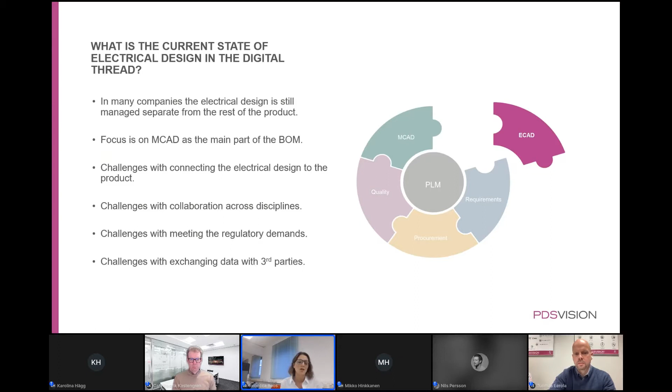And this leads us to the obvious question then. Can the electrical design be included in the digital thread? And the answer is yes, of course. You have all the tools already.

That allows you to have the ECAD data integrated, not only into the BOM, but also visible in the model across the enterprise and possible to share with production or third parties, and even used in the extended digital thread when the product has left the production facilities. And it can be used in simulations. So what can it look like when ECAD is integrated into the digital thread then?

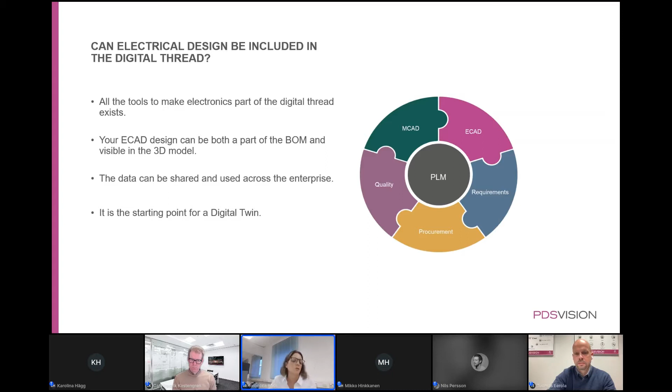I'm going to share an example with you. So what we see here is a snowmobile in Windchill, where the ECAD information is fully integrated. We see the BOM and we see a visual of the model. You can see a lot of information related to the items in the BOM here. What it is, quantity, what state it's in, if it's released, for instance. And there's also information related to sourcing, if it's a make item or a buy item.

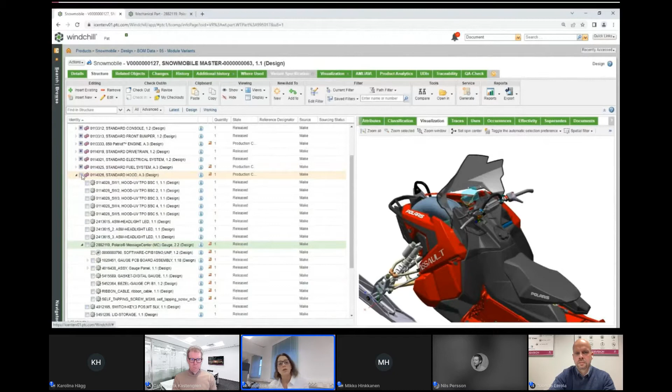We are able to navigate the BOM. We can see the connections between the BOM and the model. You can, from a selection in the BOM, see that part highlighted in the model. And it works the other way around as well. Selecting a part in the model, and you can see where it resides in the BOM. You can zoom in and you can zoom out and twist and turn the model, as well as hide parts.

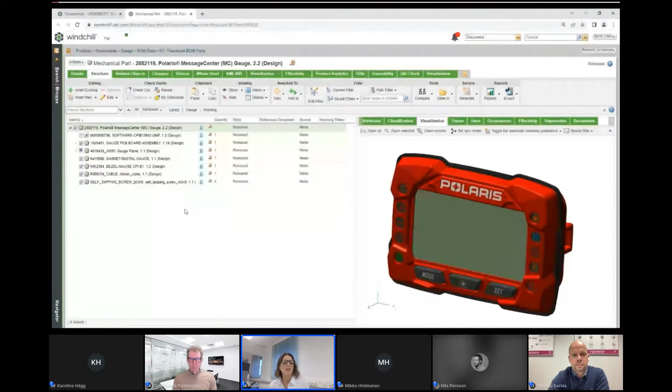In this example, we want to look at the display unit, since that one includes electronics. So for sake of simplicity, we open this one in a separate tab. And here you can see the BOM, and you can navigate the BOM in the same way as we did for the big snowmobile. And we can click and see the entire ECAD BOM. So the behavior here is the same as for the MCAD.

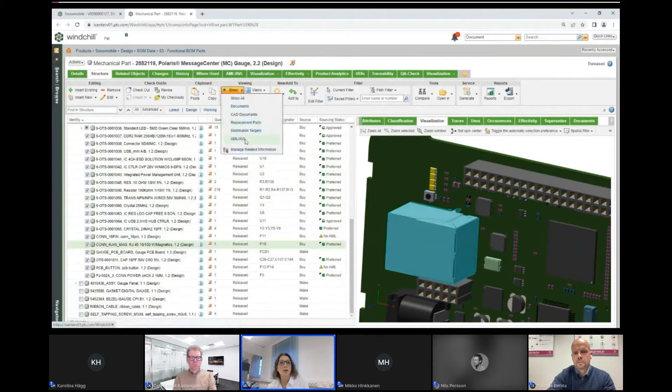For the ECAD, you can see a lot of information. Here, you can see reference designators being an important thing for electronics. You can see that you have documentation and information available, relevant files. You can also see information related to suppliers with a link to approved vendor lists and approved manufacturer lists. In the same way, you can also view information about, for instance, RoHS and REACH, something that we will touch upon later.

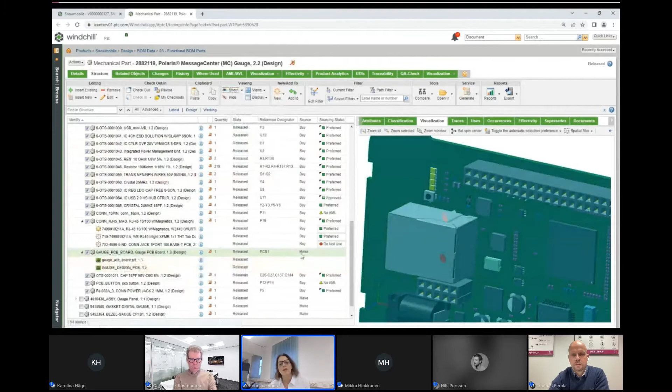And having all this information in one place, available for everyone, traceable and reliable, does not only increase the efficiency, but it also improves quality and creates a foundation for good cross-functional collaboration, where you are able to look at the entire BOM, not only the mechanical parts of it.

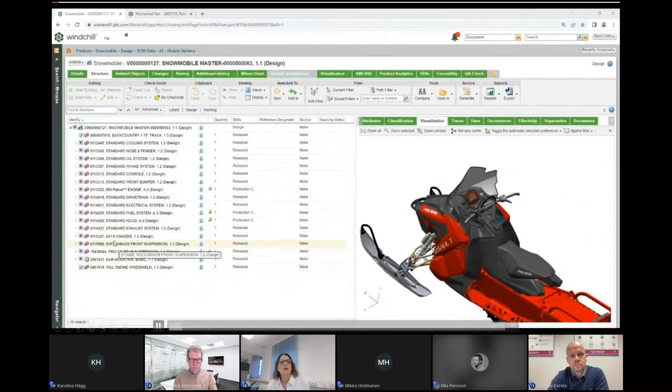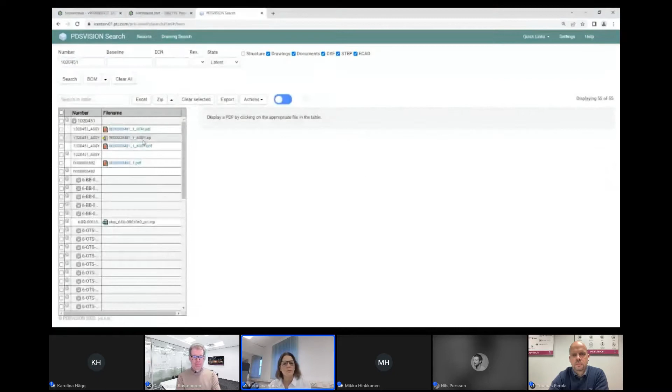You can select if you want to see the complete BOM, what kind of formats you want to see. And for the sake of usability, there's also images available. You can select if you want to see the PDFs. You can open them up to view the information. And you can also select what information you would like to prepare and package for, for instance, communication with suppliers or even customers.

So this is one way of communicating with third parties. This communication can also take place via, for instance, a supplier portal. And when working with the supplier portal, it's also possible for the supplier to upload information that you can, in a later state, then include in the BOM, which can be a valid case if the design is outsourced.

Okay, so we've talked about and we looked at what the reality can be like with an integration of ECAD data into PLM and the BOM, examples of what you can see and what you can do. So what values does such an integration bring to a company?

First and foremost, having all the product information in one place gives some obvious and immediate values. You have the visibility of the complete product across the enterprise, allowing everyone to look at the same reliable information. This obviously facilitates collaboration, both in virtual teams, across sites, and it makes life easier in production, service, and aftermarket when you can view the same information. This also means that you're able to have the right people working on the right version of the right data.

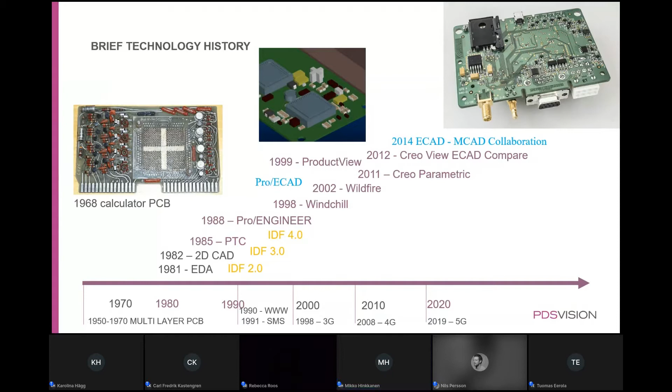So if you take a look at the Pro ECAD product that emerged in the late 1990s, you could already then bring in the key components from electrical design, make them visible in mechanical CAD, and start collaborating and discussing whether there are interferences between the components or if the bill of material should be in the mechanical CAD or the electronics CAD. So it's quite a long way ago, over 20 years.

And over the years, we have refined our technology and made it more and more mature. And today, you really can't tell on the top right image if that is from the mechanical CAD or if that is just a photograph of the actual component. So today we are able to really nicely exchange the product information from one domain to another, thus enabling a cross-functional team to work. Next slide, please.

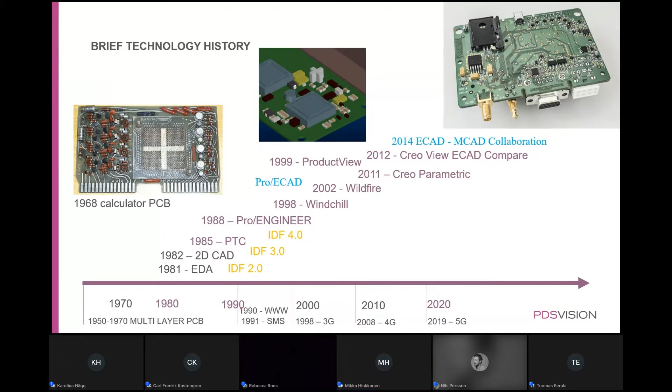And if we take a look at how the actual data exchange happens between the electronics CAD and mechanical CAD domains, today we have text files which we push back and forth, and they describe the products at both ends of the system. And that has been there for a good amount of years. But on the other hand, if we look at the way it's been managed, if you just write out the ECAD files to a disk and then read them in, this leaves a lot of room for improvement when it comes to making sure that you always have the latest version of the data at hand. So next slide, please.

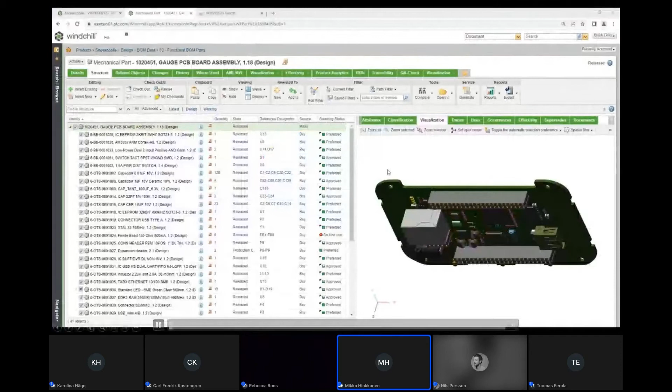And if we take a small video and take a look how does it look like really. We have the same PCB that Rebecca just showed us. And if you go for different visualization formats of it and open them in the same Creo View system, then something magical starts to happen.

So first you open just a mechanical kind of model where you can see all the components. And then additionally, we will add some more information here. As you can see, when you open it in Creo View, you can add it to the same session, thus making all of those three viewables available for you.

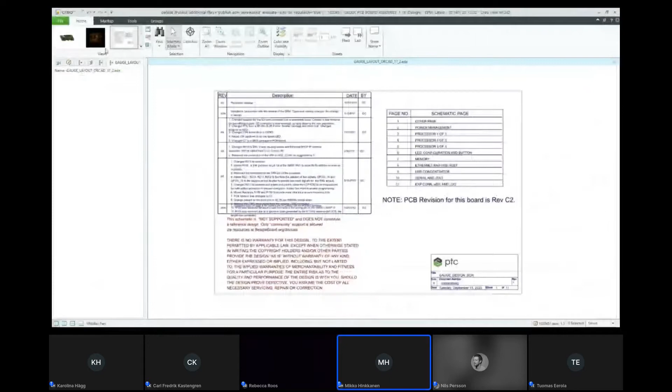And in here we have a drawing for that particular item. And here we have a kind of layout, which you can start controlling. Do we have logical connections, or do we actually have the routing or the conductors between the components? And do we want to see the printed silks and all that kind of component information? Just filter based on your needs.

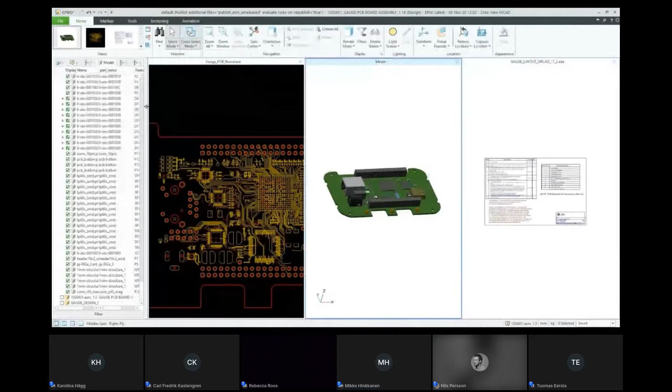And then you can have them side by side, which of course makes it quite handy to understand what is exactly happening here.

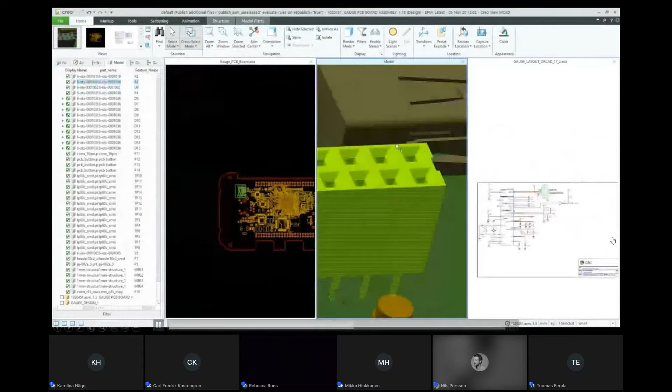So now when you start clicking around, you can enable so-called cross-highlighting, so working on one component somewhere always updates the information on the other windows. Let's see. As you can see, clicking that component will highlight it on the other window. So it's getting a bit easier today to probe the product and find out exactly what is happening here, or what the design is.

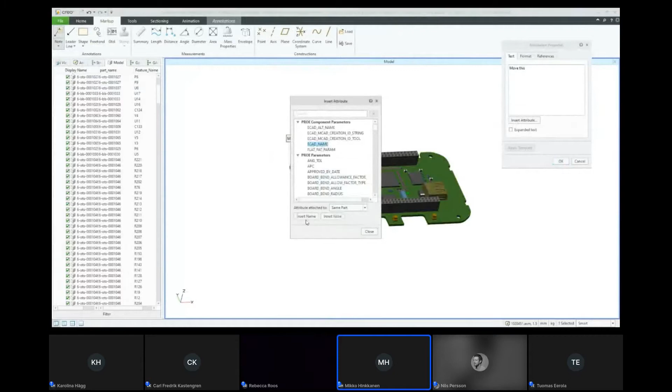And when it comes to collaborating, if you have a geographically distributed design environment where, let's say, electrical design is in the United States but the mechanical is in Europe, then what we want to do sometimes is write notes back and forth in order to document the changes or document the requests. Can I move, for example, this one a bit?

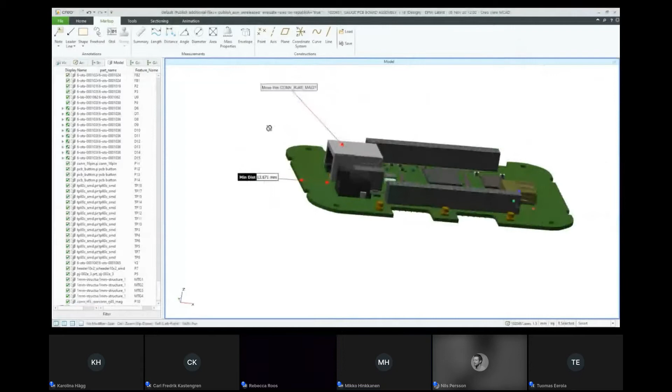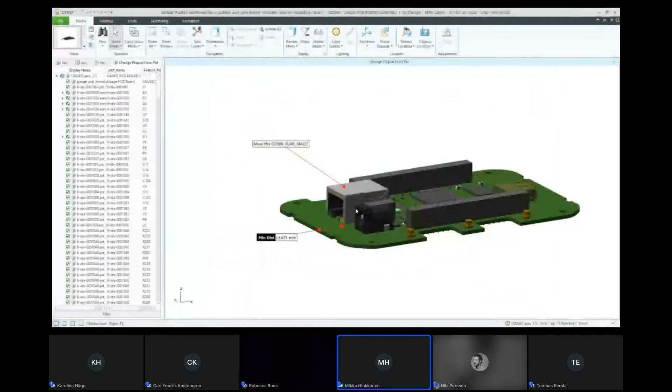So what I do is save an annotation set in the model, write some kind of comment like 'please change this one' or 'can I change this potentially?' Store it, and it will be stored on Windchill on the product information. And of course, you can share that for your teammate and ask kindly whether it would be possible to change this. Please take a look at the link, and when he opens it, it opens up exactly the same for him as well. So it's enabling really nicely the collaboration between the domains.

Next one please. But if you take a few steps to the future, what it might look like - so far we've just been having a ping pong between the files in the system. Please, next slide. But how about the future? What will the future hold for you?

So let's take this role that we have Paula, and she is a PCB designer, designing those printed circuit boards. Initially, what she does is just collect the key components and make some kind of fun sketch of the rectangular black PCB and store that to the system. So this is just the initial - okay, this is what I might require to make a product.

But then Mike, the mechanical engineer, comes to the working place and starts doing his daily job. And one of the things he can do is connect to the ECAD system alongside Windchill.

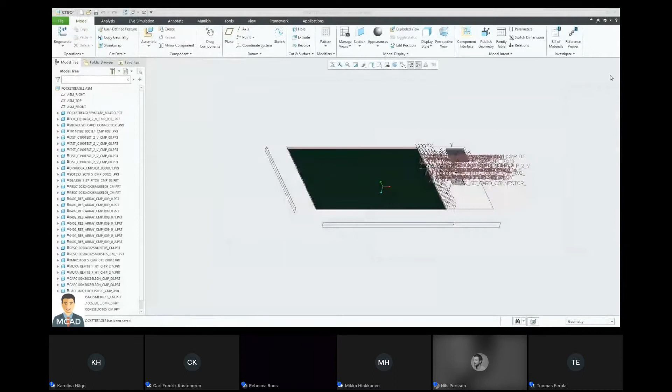Then some display manipulation. As you can see, all the components are already available for him in the mechanical engineering domain. Then what we do next is add covers for the product.

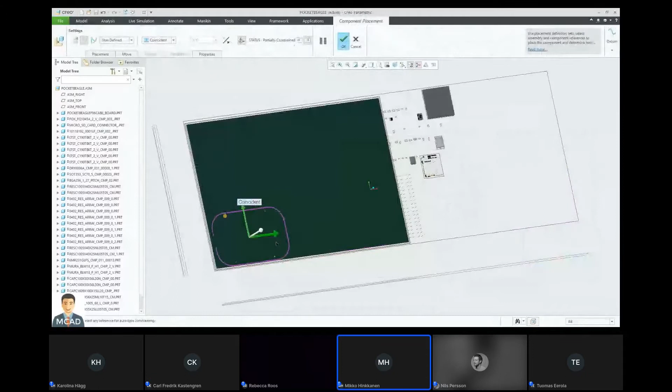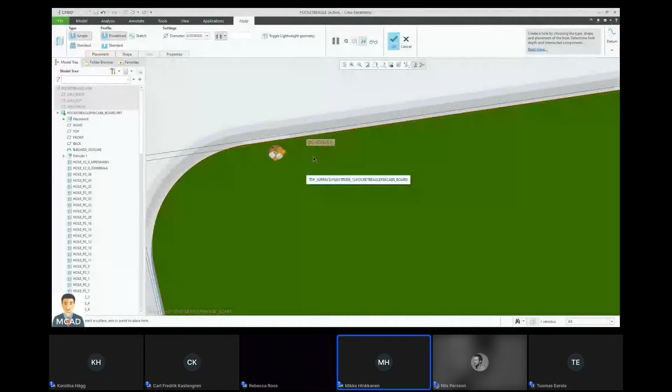So here, some kind of casing, which comes from the industrial design team I believe, is placed on his mechanical design and we start manipulating the design so that it will fit for the purpose. First thing to do is manipulate the board layout so it will fit in the enclosure. Using basic modeling operations, we make sure the board holes, general form, fits and functions for the board size and shape.

And then we simply drag the models and place them on the PCB board so that mechanically the design is valid, without really consulting any of the electronic design, but something that makes sense in the mechanical world.

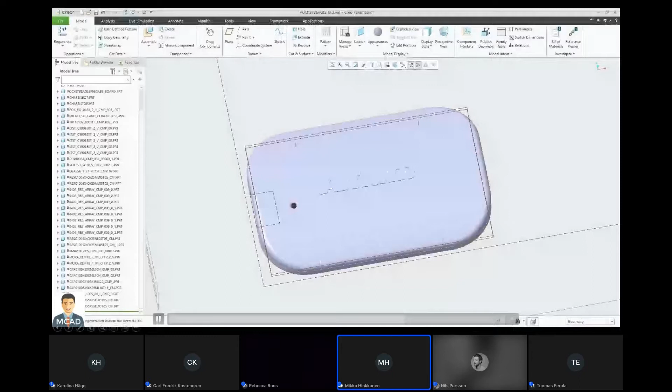And then at the end of the day, what we do is check in our design, or push it in, for the PCB designer to be amazed: okay, this is how the mechanical team is seeing the situation, thus starting the collaboration between the different design teams.

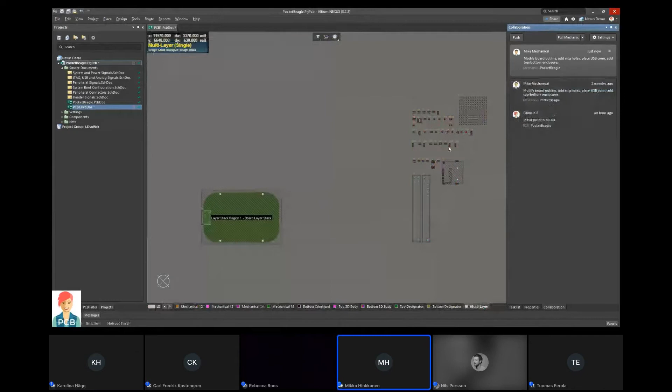And when Paula opens up the design which she made originally, she can see that some of the components have been changed, some of the locations have been updated. She can now either accept or refuse the changes, either one by one or let them all come in. The server keeps track of the actual location of the components and everything used, and from this point on she can start her work with the design.

Next slide please. If we take a look at this server-based approach, of course this is as efficient as it was with transfer files. But what we can do here is accept or reject the changes with previews and everything, and all the iteration history is kept for later reuse, or if we have to go back for some decisions - why did we make it like that - we have some starting point for that discussion anyway.

Next one please. So what I see is that after this small history introduction, when we come from the file-based back and forth - sending out and writing in files which describe the PCB data - we are coming step by step toward the actual server-based design, where we have all these design domains on the same PLM, thus enabling us to make a nice, complete product description.

Next one would be Tuomas, I would believe.

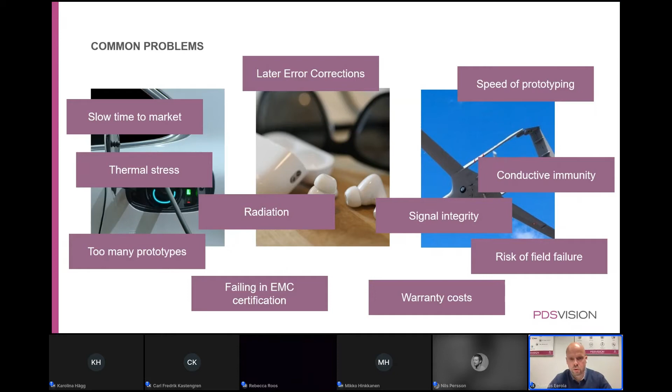So the problem that becomes visible in this designer's case is that testing and measurements, they are great. They show that there is a possible problem. But unfortunately, testing and measurements doesn't provide a solution. Locating the problem will rely on the designer's experience and expertise.

And this is something we can now improve using digital design validation. So if we go and offer the PCB designer simulation tools that connect to the person's ECADs, we can get systems up to standards already before testing starts. With modern simulation tools, the designer can verify component placement, spot all kinds of impedance variations, and diagnose EMI issues. And this all together will help the company save costs and cut down the time to market, and also make the product EMC more predictable.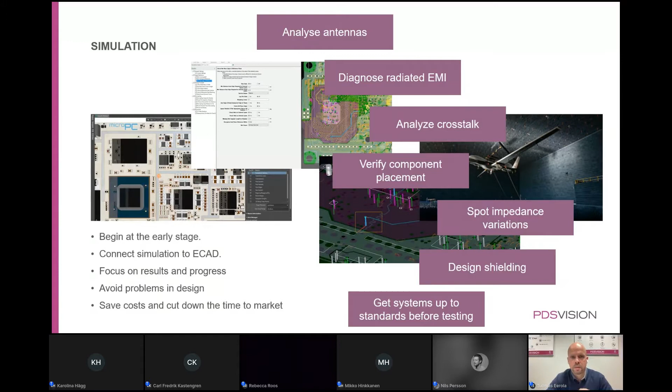So the testing will actually become just the final validation. Yes, thank you, Nils. So I am not suggesting that simulation would totally replace all the measurements for electromagnetic compatibility. I am suggesting that simulation can streamline both the product development process and the validation phase.

And the tips and tricks I would like to share with you is that please use simulation for digital design validation to prevent EMC issues. And when you have a subsystem design, use simulation to analyze and optimize it, so it really stacks up on each other. And when you have these two under control, then you can even simulate the full integrated system. If you are interested in doing this, I have a great team, and we would be glad to help you navigate this.

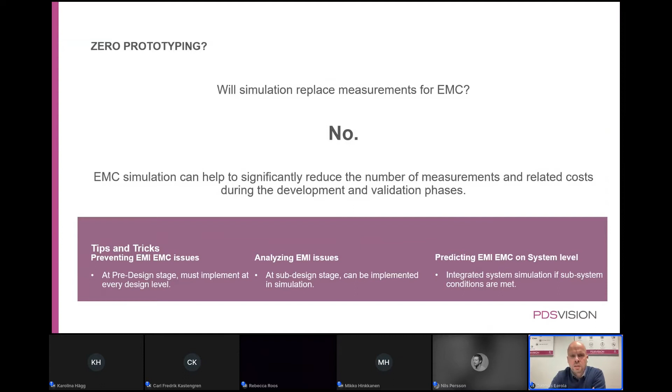Nils, let's look at the following slide, and let's see what this looks like in numbers. So PDS Vision partners with a company that decided to connect to the growth of electric mobility. They had a long history in business and really solid experience from power electronics. But this electric mobility, this is a totally new market, and new market means new rules and new requirements that they had to take under control.

When they started exploring the new market, they noticed their speed of prototyping was all too slow, and they discovered problems too late during the product development process. In the worst case, that was when the product was in testing at the partner's lab. And altogether, their time to market was simply too slow. And because the market was growing fast, they had to develop their agility. The common denominator in all of the problems was electromagnetic compatibility.

And by implementing design validation, and especially digital design validation, into the product development process, they were able to cut down the number of prototypes they had to do, avoid late failures in the product development process, and get a radically faster time to market. And this all provided them huge savings and really a return on investment that was easy for them to justify.

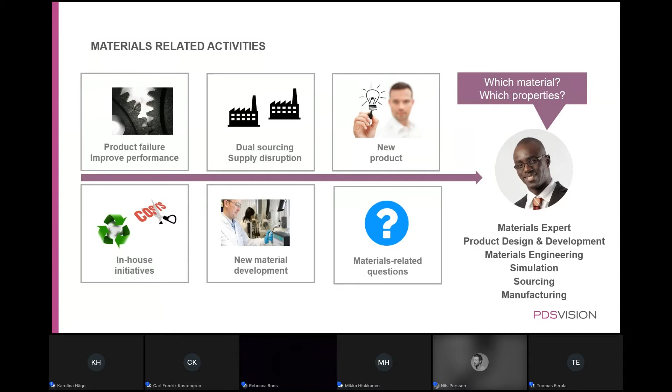And on the other hand, in the simulation field, we quite often optimize our constraints and loads, and have multiple load sets and boundary conditions and everything. But then you ask, okay, how about material? Yeah, we made that out of steel again. And then somebody shouts from the back row, okay, how about aluminium? And then you're like, okay, maybe, but maybe I'll just simulate that with steel.

So the question is, how would we have it so that we can actually optimize the material selection as well in order to get the optimal product? How do we involve material selection in the product optimization loop is the key question here. Next one. And if you go forward, skip the animations, one more,

and one more. So the typical approach is really that you have an ongoing issue at hand, and then you start having discussions. And since you have some in-house expertise, some people are very used to using just one kind of material or one kind of solution. The guy on the back row is shouting aluminium, and everybody goes for aluminium instead of thinking out of the box: how about if this time we use, let's say, some plastics or polymers instead to make the product perform a bit better and have a better cost point as well?

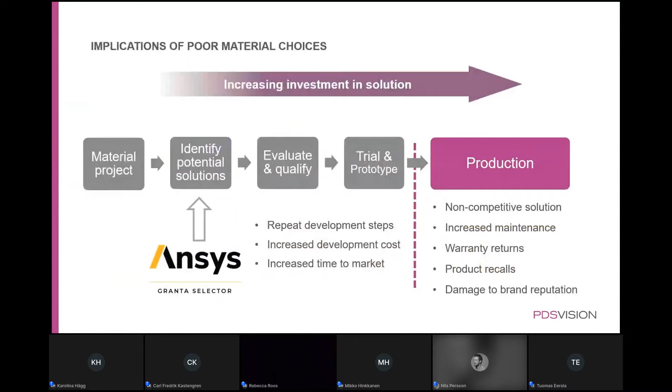So the question is, how do we make informed decisions based on the challenges we have? There's a vast array of data available. Next one. We can skip this one, please. And this one as well. It seems that my hiding of the slides doesn't really work. And if you click once more, you will get one extra box in there.

Thank you. So what I suggest here is the systematic selection of materials methodology. In the same way that we define the best possible solution for, let's say, some stress-strain situation like product optimization, mechanical analysis, or electrical or thermal analysis, we would do the same thing with materials selection. So define the basic function. What is the geometry and primary loading? Is it thermal, mechanical, or electrical constraints?

What exactly do you have to meet? Is it a maximum insulation value, or maximum acoustic damping, or what do you want? And then objectives: what do you have to minimize or maximize? Is it the cost of the product, or product performance, or minimum bending, or capability of conducting the largest amount of signals through the system? What are the objectives? And then start screening from all the materials in the world. Get the top candidates, and then start digging deeper and deeper for the exact material definitions. What can you have? Next one.

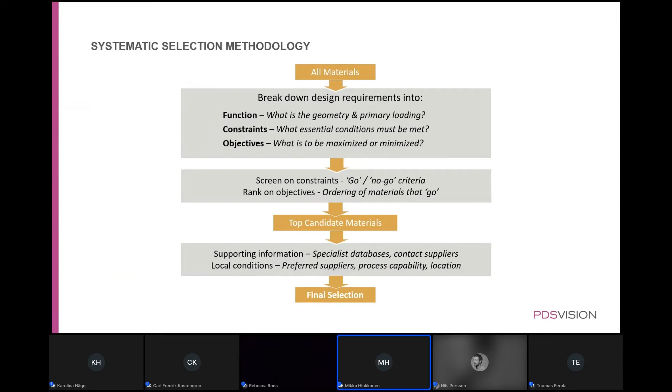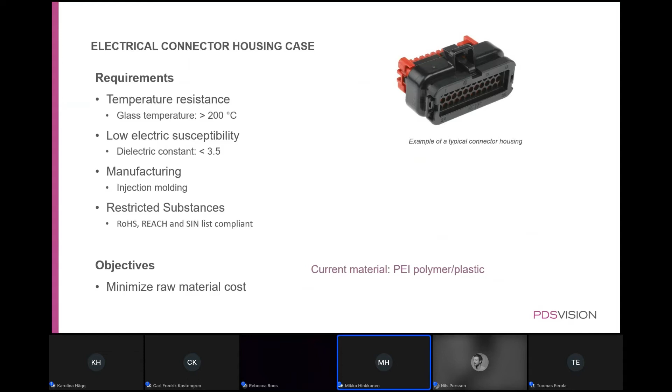And if we put this in some kind of fun use case, so click a few animations forward. We have an electrical connector, which has some requirements like temperature resistance, so it doesn't melt. Second of all, it has to have a low dielectric constant, so it doesn't start altering the electrical signals too much. On the manufacturing side, it has to be injection molded, so that we can make millions of them. And then, of course, REACH regulations, all the compliance requirements must be met in order to make it happen. And of course, the objective of all this design is to minimize the raw material cost.

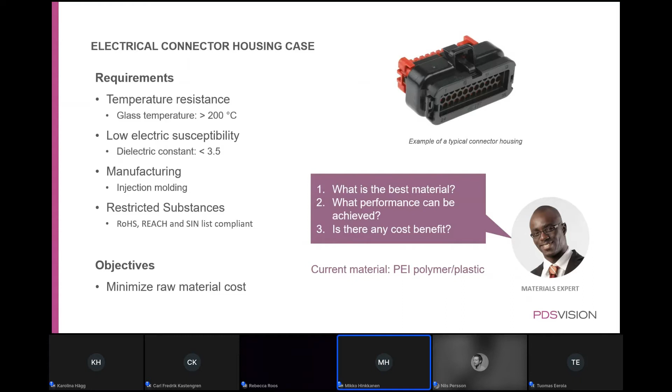And if you know today that it's polyetherimide as a plastic, the question is, what is the best possible material for this kind of use case? What kind of performance can I get from it? And do I get any cost benefits from it? So if we look at the small video, which I believe comes next, we will see here in the Ansys Workbench environment, one has a Granta Selector application connected to it. And then you open it up.

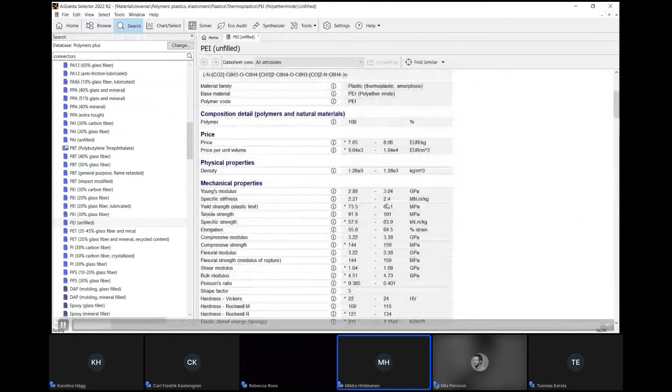And start searching for connectors as a general thing, going to the MaterialUniverse database, and here you can see that polyetherimides are typically used in electrical connector designs. And then you take a look at the data, you will find there's price data, there's also mechanical properties, impact and fracture properties, thermal properties.

And then my video is lagging a bit behind me. Let's say multiple kind of fun properties for the system. Oh, it seems that my video was paused.

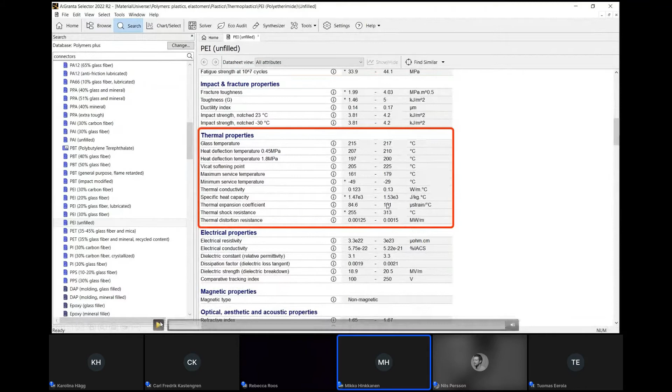And you even have healthcare and food, and restricted substances and risks and all that. So we have generic polyetherimide data, and here we have some brand names like Ultem. And if you want some even deeper data for it, you can get there. But on the other hand, you can say that this is my reference material, which I start comparing with.

And then what we do is say that I just want to have the possible candidates that are injection moldable, since that is my preferred manufacturing method. And then let's have some additional limits like the glass transition temperature and the dielectric constant. So you put a minimum glass transition temperature of 200 degrees, and for electrical properties you put 3.5 as a maximum value. And then we start searching for the potential candidates. And of course, since RoHS and REACH are pretty interesting for us, we also have those as maximum values.

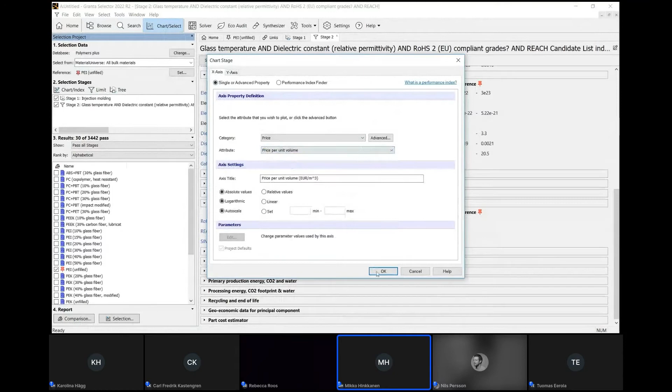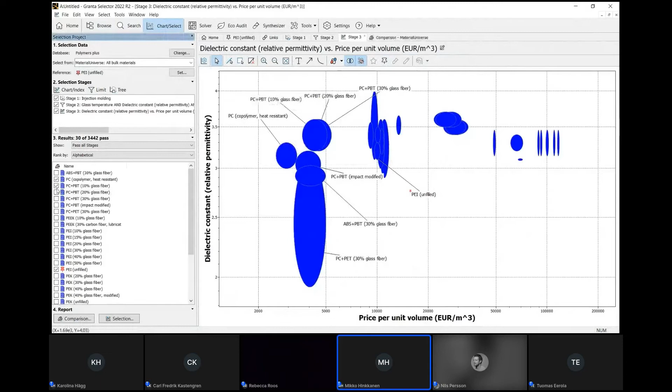And then a pretty nice feature of this Granta Selector is that you start plotting things against each other. So here we have the dielectric constant, which you plot against the price per unit volume. And now you will find that there are all potential materials in the world, but here we have the nice ones, which are the polymers. And here we have the current reference point for polyetherimide, and some other plastics as well. And as you can see, something like polycarbonate has a nicer price point, but it is still in line when it comes to dielectric constant.

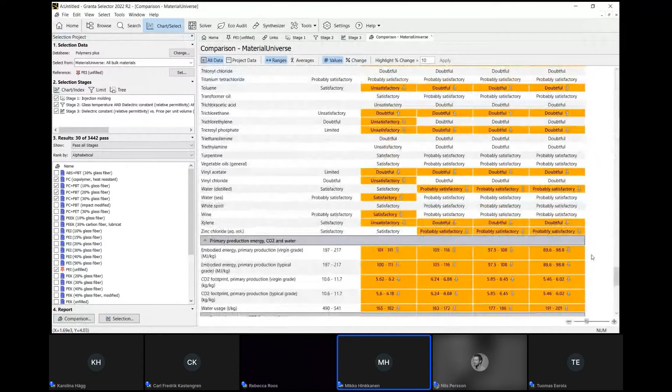And if you then start comparing some of these plastics together, we can have this table view comparing exactly the particular values or properties that you might be interested in. And when it comes to simulation of the thing, let's see what we have here.

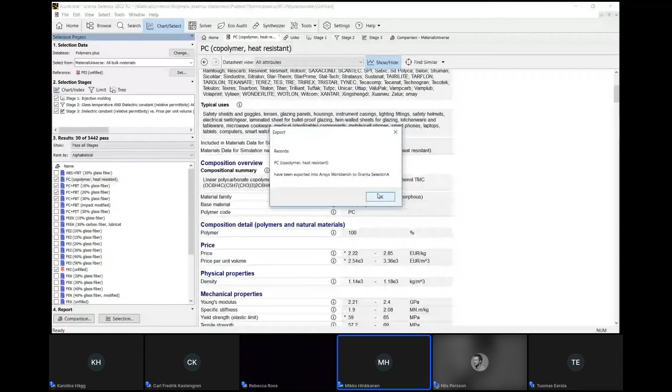And if you go deeper in the data, you will find it's possible to see the possible manufacturers. And if you want to push out the material data for simulation, that is also possible. And if we go back to the Workbench environment, we have the same polycarbonate, and you will see that we have temperature-dependent properties exported from the Granta Selector. So you can go to the next slide without running this again.

So as an outcome, what we find out is that instead of polyetherimide, we can go to polycarbonate most likely. Just a bit of investigation if it fulfills all the other requirements for the material. But what we have shown is that if you have an analytical approach for selecting materials, it can really pay off when it comes to the material properties, when it comes to product performance and the price point

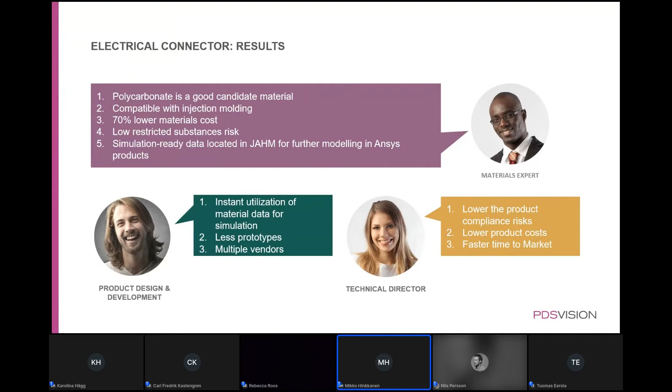of your products as well. Can you go to the next slide? Yep. Just run to the end of these things. I think there's multiple animations which I tried to remove, but it seems that all versions are a bit off.

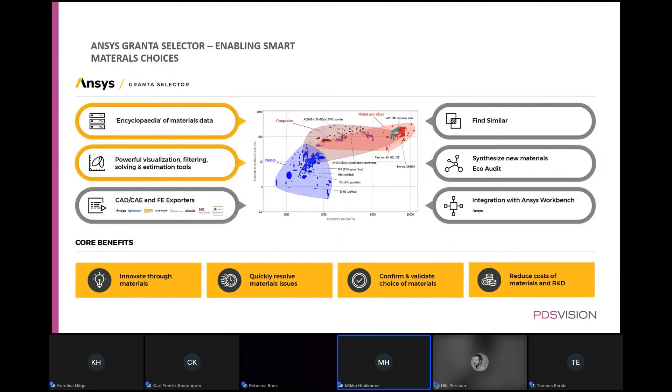So just to summarize the Granta Selector for you. What we have is the encyclopedia of material data in there, which enables you to have an analytical approach for material selection, compare the properties, and find the best candidates for your products. And also we have capabilities like compliance and restricted substances supported in the material selection process.

Can you go forward? And then again, you have animation, something like 7 or 8 in here. So click them through, please.

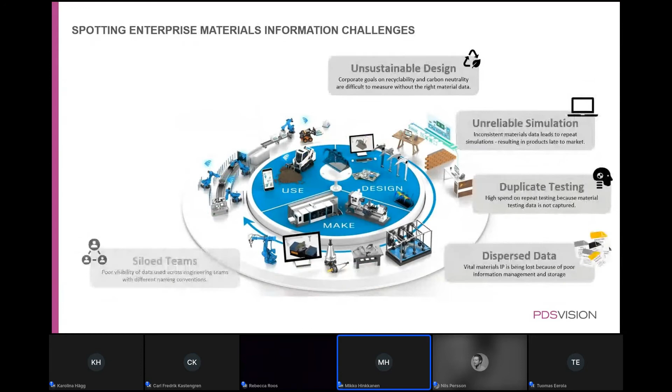So if you think about it corporate-wise, I'm a bit overshooting my timing here, but nevertheless, what kind of questions do we have? Materials information. We have a bit of the similar thing as in general product data management. We have dispersed data, we have siloed teams, we have raw material issues and regulatory compliance. And possibly the question is, how can we make this better at the corporate level? Next one, please.

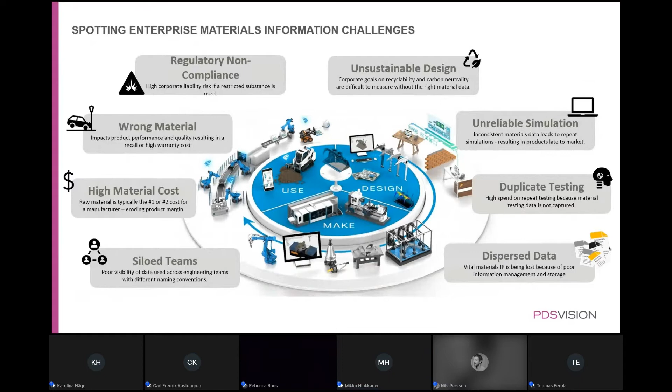And one of the solutions could be to start using a dedicated material database for all the materials involved. And of course, this will make the materials database a single source of truth for all materials-related questions, particularly if you have your own in-house material development, or you have specific properties data which is not commonly available. And for that single source of truth, it will make sense that what we have is nice.

Please go on. If we have nice integrations to systems like CAD and CAE systems, and of course the PLM, where we can feed the downstream systems like MES and ERP. So materials data management becomes an important thing for the full product definition and the full digital thread, particularly when we have these regulatory compliance things that you have to feed, that the product materials don't contain anything that they shouldn't.

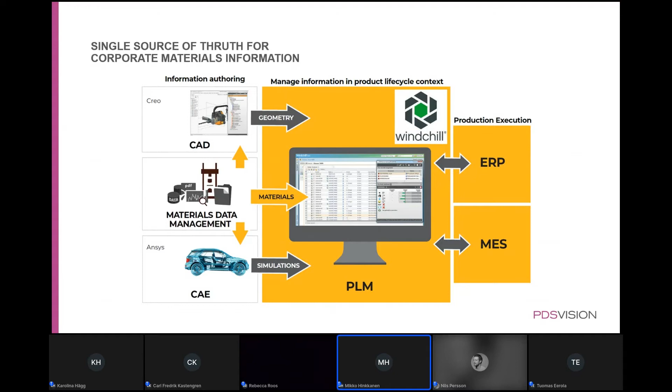So in order to describe fully what kind of substances we use in manufacturing and during the use of the product, we might have to have a separate database for materials data, and from there derive the results and materials models for the finite element analysis. Make sure that the product documentation in the CAD refers to the same materials, then define the materials in the PLM as well, so that they will know the exact recipe of the component that we are using, and thus we are able to feed even the ERP system. Next one.

And this is pretty much the same thing. For the centralized materials data system, the beneficiaries of this implementation are, of course, materials engineers who help the material selection or development process, the simulation engineers who will get the proper material data and reuse it every time, so we know exactly what they used for the simulation. Then product design can reuse the data and select properly documented allowable candidates. And the regulatory and environmental people can make sure that everything is okay for product launch. And all of these can be connected to Windchill as a product description. Next.

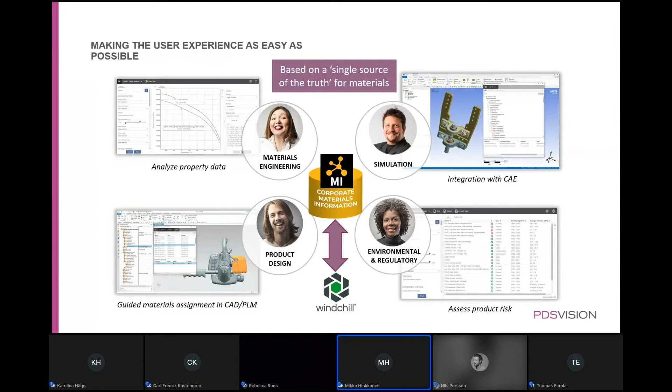In a nutshell, what we are showcasing here: first was Ansys Granta Selector, which enables you at the desktop application level to harvest all the materials in the world and get the post-processed candidates. On the other hand, Granta MI gives you the accurate materials information for the particular ones you have ended up with, documents them and makes them part of your digital thread.

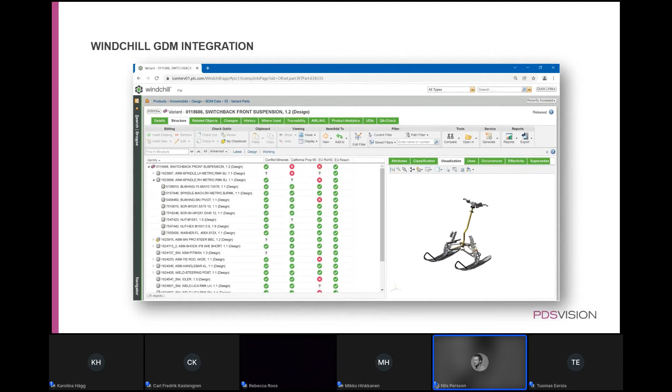So spreading this knowledge internally, making it visible, has been one of the main objectives for us as we built this product. So how we decided to go about this is to present the various compliance status rules and the status for each component in the structure pane within Windchill. Our hope is that this will allow other departments to mitigate risk and make strategic decisions earlier in the R&D process. If required components have not passed compliance, you can decide for an alternative at an earlier stage in your process.

Apart from visualizing the compliance data in PLM, our MVP product also addresses the manual steps that are commonly required to source for compliance information. As we mentioned earlier in the session, some of this information is commonly scattered. It could be electronic components being in a separate system, or some of the information being stored within ERP.

However, if we do store the electronic components within Windchill, as well as the required supplier information, we can, with this integration, also create sort of an automated workflow to send information directly from PLM to the sourcing departments for compliance information, resulting in a faster turnaround time to collect and receive compliance data. The manual process sometimes also results in mistakes of sending, for example, duplicates of the same part for sourcing. So with built-in QA steps and functionalities within Windchill, we will help to avoid this.

We are currently in the process of evaluating this product with some pilot customers, and will release additional information about this product soon in various forums.

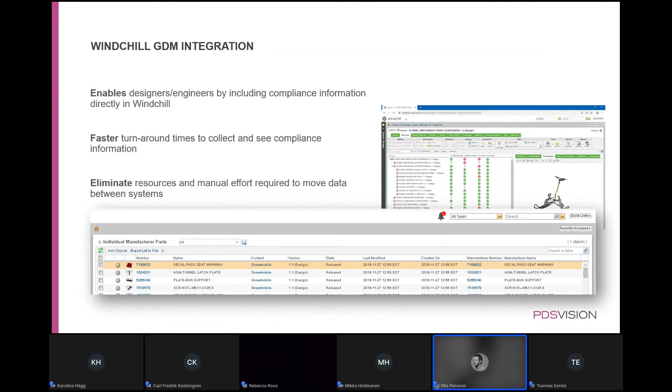Windchill also has a set of tools that can help us when it comes to the visibility of replacement components and suppliers. Starting with SUMA, Windchill Component and Supplier Management, we can, for example, define and manage relationships between supplier parts and internal parts. We can manage supplier profiles and the information in regards to that specific supplier. You can define your preferred component and supplier by a sourcing context. This could be your specific product line, a factory location, depending on existing or new products, for instance.

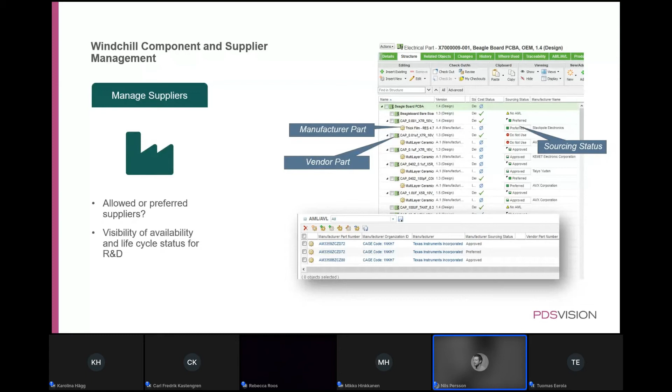You can also define supplier parts preference, for instance, if you have a preferred supplier or an approved one, or someone that you should not use. So the sourcing statuses, the manufacturer and vendor parts can also be shown within the structure pane, together with the compliance information from our integration. So SUMA is quite a powerful module within Windchill that can tie supplier information closer to our product data, once again making it more visible to the enterprise and aiding keeping track of supplier information as the number of suppliers grows.

A simpler approach is replacement parts. This is built up by substitutes and alternate parts, where substituting a part can replace the part only in a specific product structure, as opposed to an alternate, which can replace a part in every product structure. This functionality would allow us to define what alternates we have for a certain component, what parts can be used to replace that one, and if it's out of stock at a supplier or does not pass compliance, we can see the alternatives that we can use instead.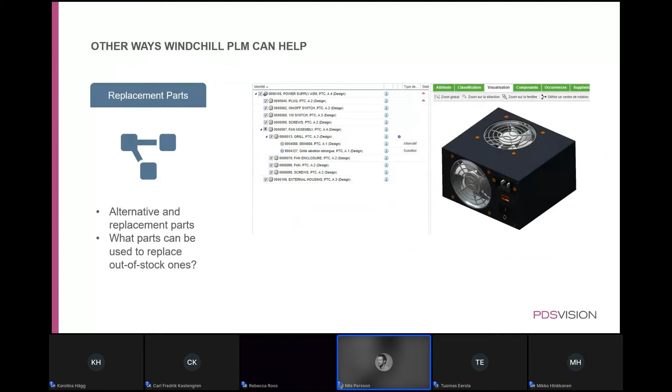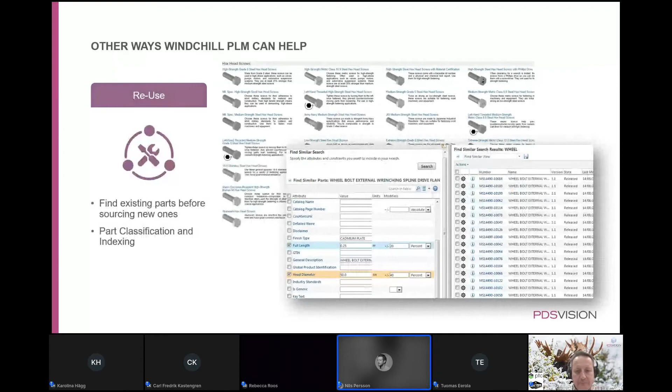The best way probably is reuse, and to avoid introducing new components, it's of course best to try and locate components that we have already been using. One helpful tool for that could be PartsLink and part classification, which helps us ensure that parts that are created and perhaps already sourced are used to their fullest extent. Classification within Windchill allows you to easily and intuitively classify parts with multiple metadata. And with both visual and faceted search, we can quickly determine what components would suit our design and pick components that have already passed sourcing, are approved, and hold a high quality.

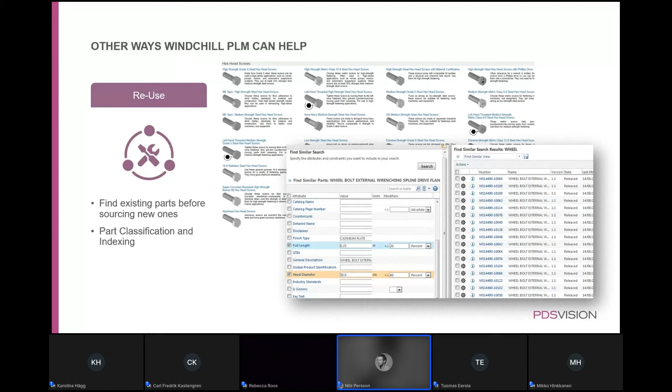Some of the values we can bring from this is that we can feel confident entering new markets, knowing that we are in control of the various regulations in the region and how they will impact the product. We can differentiate ourselves from competitors with a robust supply chain and provide all required compliance data related to various components. And with more information available about sourcing and compliance in PLM, we can be more flexible and mitigate risk within the R&D process.

I hope this short introduction gave you some ideas of how compliance and supplier information can be part of the bill of material and your digital thread, and how you can mitigate risk and make more strategic decisions based on it. So as we now have taken control of our digital house, how can we work with IoT to expand the digital thread and gather information from products within the field?

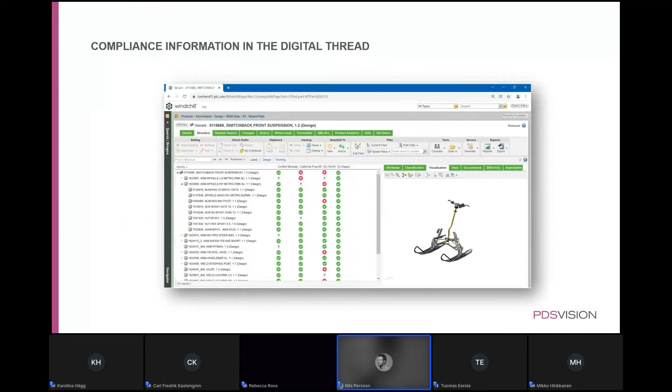Thank you, Nils. Thank you for the introduction and bridging to this presentation as well. So let's jump to the next slide in this one.

So what we have done up to now, we have talked a lot about how to keep the single source of truth and to keep the digital thread for the product development within the company. And that is, of course, very valuable, and most companies will gain a lot from doing so.

But in fact, what most companies in reality have is a digital thread that ends on the loading bay. When the product is designed and produced, we put the product on the loading bay, some kind of transport takes it away, and all the digital thread and digital tracks end there. So we have almost no understanding of what is actually happening with the product when it's used, how much it is used, and in what way it's used.

And that is, of course, something that we would like to change, and we would like to support you in how to connect your products, and by that, bridging and continuing the digital thread over the complete product lifecycle. So that's the next slide, or the next animation.

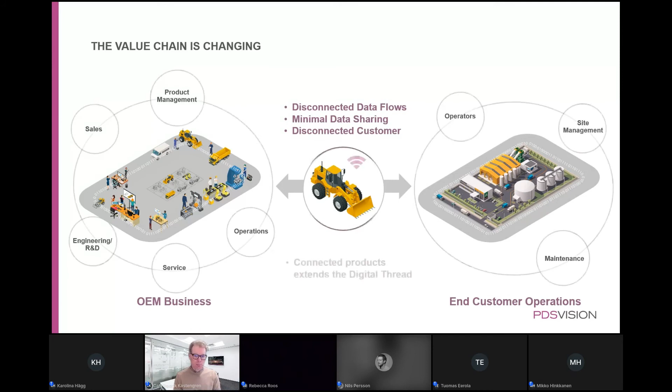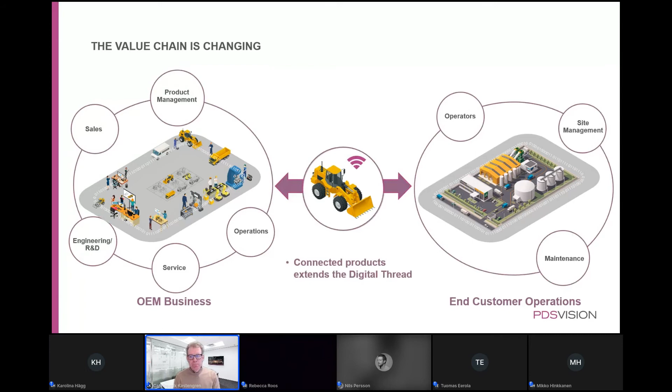So what we would like to do when we go to the next slide, we can see how the digital thread continues from the product and from engineering, manufacturing, and further down the supply chain, sales and support, and also down to understand the customer's operation.

And of course, there are a number of drivers why we would like to, and we believe that companies would like to go this way, to be able to have a feedback loop to have a design-driven, data-driven design to accelerate the R&D and innovation.

Of course, there's a reason or a business driver where you have to understand how you can improve the operation and have a more cost-efficient operation all around.

And finally, maybe most important, or at least a very interesting part of this, is not only to focus on costs, it's also about how to increase revenue. And here a number of new possibilities come into play when you have the possibility to create connected business models. So let's have a look at the next slide.

Thank you. We also have to please go back one. Further back. Thank you. And the subline or the box in the middle, on the bottom.

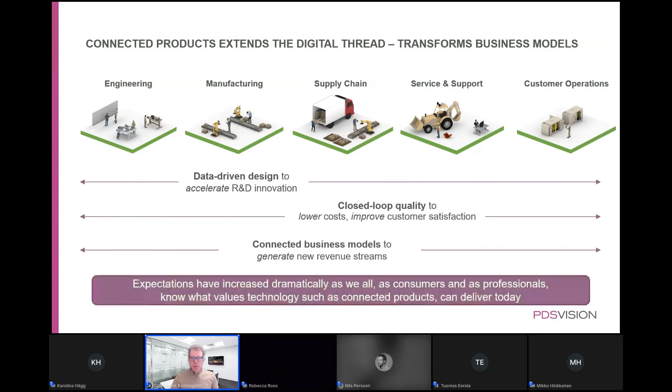Very good, thank you. So let's go for the next one then. We dive into the different drivers and what they really mean. So if we start with accelerated R&D and innovation...

If that is what we would like to achieve, we see that examples of that could be that we make use of real world data, that we understand how the product is really used, and that we design our products out of the actual requirements, not only requirements that we have invented in our offices or in our laboratories.

We also understand how products are used, which features are used the most and which are not used at all, and can question ourselves: why don't customers use these features? Are they really poor, or are they designed in the wrong way?

And of course, we can feed back data to our simulations and understand if we have a valid model and that our simulations are correct.

When moving into driving operational efficiency, it's all about having the right data available at the right time, at the right place for people working in the processes. And that can be done, of course, in a number of different ways. We will come into a few of them later on.

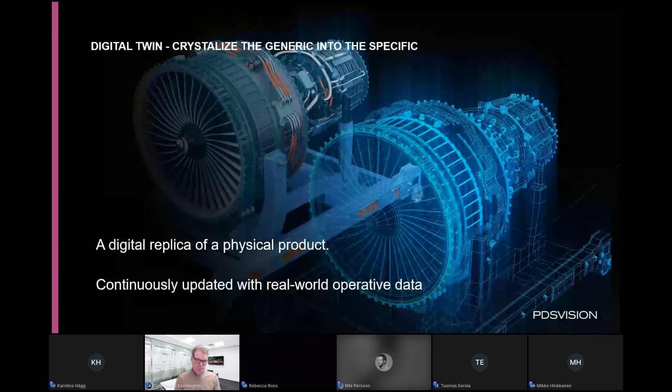So for us, when we design and help customers design digital twins, we combine what we're able to capture in the PLM system with what we're able to capture in the IoT platform, and then connect these two platforms to all the surrounding solutions we have in place or support customers in adding.

To answer the earlier question, for the time being we add information about software and software versions into our IoT platform. When products are updated, we also make sure that information is kept in the IoT platform. But of course, when we find a better solution for that coming via the PLM data instead, we'll have that option as well.

Regardless, this is the complexity of the digital twin. It will increase, and of course it's a matter of how much data analysis you'd like to do to address your use cases.

On the next slide, we see this commonly used description of the different levels of data analysis where you'd like support from your digital twin. We can start with the easy ones, the low-hanging fruit, the obvious ones—descriptive analysis, just showing what's happening.

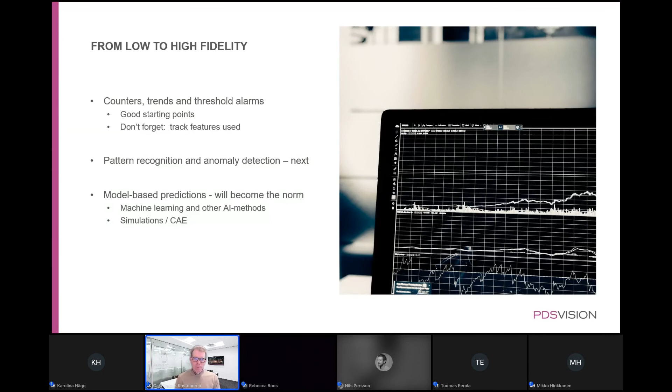If we go to the next slide, we see the potential of how this could be used when using simulations connected to IoT data. As Tuomas discussed earlier, we design a product using simulation in different ways, whether electrical or mechanical simulations. When we think we have a model that we trust, designed using assumed use case data, we prepare to validate the data in the actual product by calculating where the different sensors should be placed in the product. And we add all this data into the PLM system.

And into the digital twin. When we have products in the field, we're able to collect operational data and feed that into our simulation models. Now we have actual use case data, and we understand what wear and tear and loads there actually is on the product. By that, we can validate our model. With the validated model, we could also predict what will happen with products under certain loads or wear, or in a certain environment.

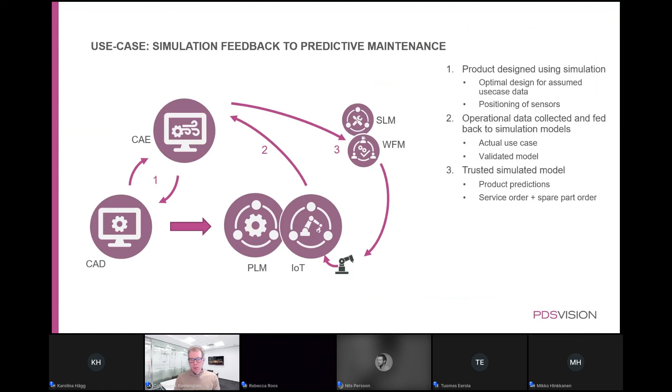Let's continue. One reference case we have done within PDS Vision is this German manufacturer of bakery machinery, the Diosna Group, where we connected their bakery machinery using exactly what we've discussed here, ThingWorx applications and PLM data. What we've done is an asset condition monitoring solution, but it's also a user monitoring solution. So we're able to both capture data from the product itself on its condition, and also understand how it's used.

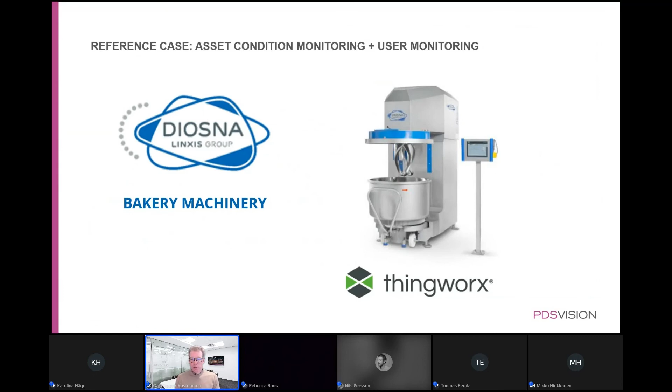So let's go to the next slide. We tie this back to the business driver we started this presentation with. The main things from the customer feedback we've got is that they are mainly pleased with the possibility to increase performance in their own service organization, being able to drive operational efficiency. What they've done is improve their response times to problems, but also get the first time fix rate to a much higher degree.

So from that point of view, they've reduced their service costs, and are also able to give the right data to the right person at the right time. When it comes to customer satisfaction, they see the uptime or availability of the machinery has increased, so they are pleased as well, as Diosna is able to deliver increased service levels.

But maybe the most interesting thing is that Diosna sees possibilities to find new revenue streams, as they can now charge higher or vary their service offerings, and can capture SLAs at different levels depending on what the customer is asking for. And as Diosna knows, secures, and controls the data streams for the products themselves, they can rely on that data and plan the service and business accordingly.

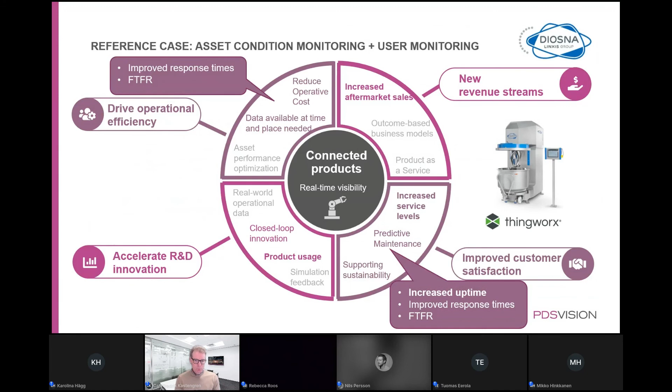So, next please. What we use for all this, to create this digital twin, is our ThingWorx platform from PTC. It's a purpose-built platform designed especially for industrial IoT, and it includes its own connectivity capabilities. It's scalable, and it's a secure solution keeping data safe.

By using this platform, we can come into place in a very rapid way. We know that we are able to set up the first application in a very short time, and we are able to deliver the data in a number of ways, including AR, to the user that needs it.

We build applications on top of ThingWorx to adapt to the customer needs, and ThingWorx can be deployed on cloud, on premise, and in hybrids. And of course, there's an ecosystem around it where we and our partners around the world are developing and adding features to ThingWorx more or less all the time.

So next slide, please. So just a basic description of ThingWorx, the main components. We have connectors to start with, where we have the possibility to connect to most, if not all, business solutions and business systems, including AR solutions, and of course the products themselves in different ways. We have the domain model part where we create the description of the product and where we model the product. And then we have the business logic component where we build rules on how to behave if different things happen.

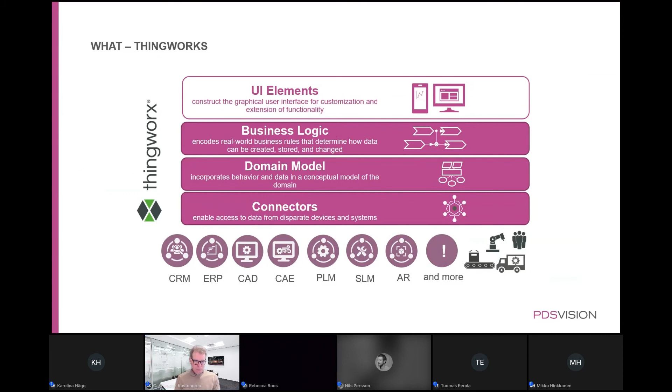So today's takeaway from the digital twin part is that we would like to emphasize that you should start your IoT or digital twin project with a business-driven approach. Make sure to start from a why. Why are you doing this? What kind of business value are you trying to capture?

Depending on the complexity of the use case or use cases, you have to have a more or less advanced digital twin to crystallize the generic into the specific. And lastly, we would say that ThingWorx is the perfect IoT platform to act as a core in the digital twin. And by that, I hand over to Nils.